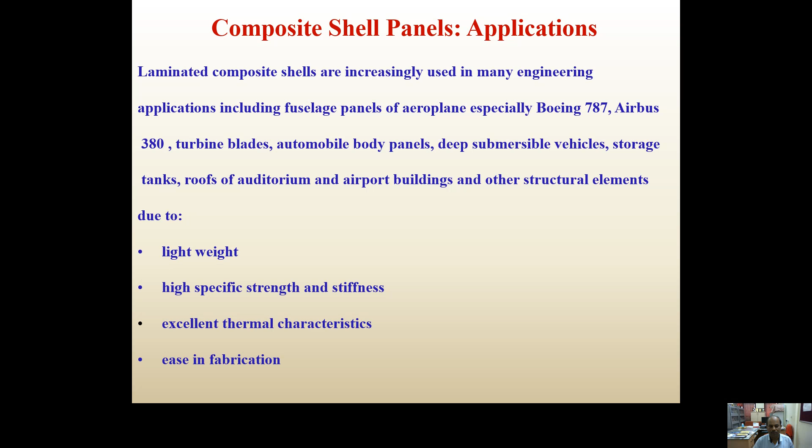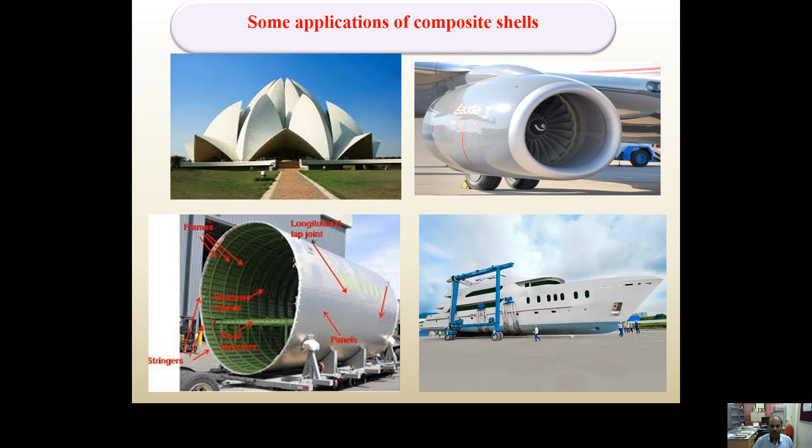The research significance of this study: shell structures are often subjected to dynamic loads, and free vibration of composite shell structures is an essential component of its dynamic behavior. Many aircraft failures are attributed to dynamic behavior of composite panels.

The vibration behavior of composite shells are significantly affected by varying environmental conditions due to wide ranges of temperature and moisture absorption. Aircraft on ground and in air have very different temperature ranges, so also different temperatures from cold to hot countries, and boats and ships in seas.

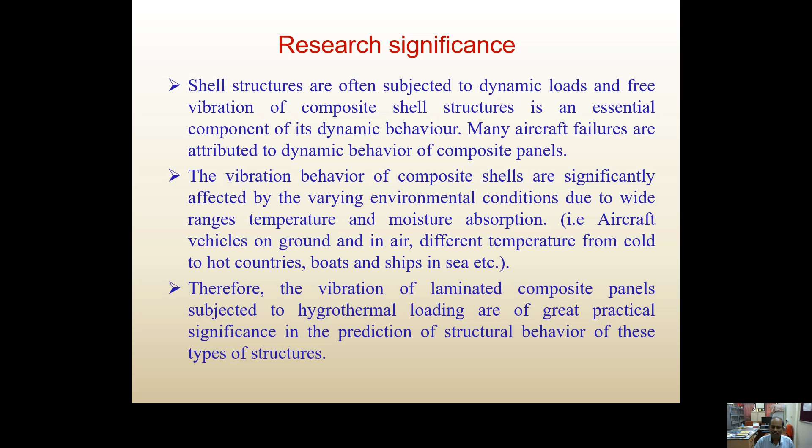Therefore, the vibration of laminated composite panels subjected to hygrothermal loading is of great practical significance in the prediction of structural behavior of this type of structures.

Coming to the literature review, some studies are available on vibration of shells subjected to hygrothermal load, though there are plenty of studies available on vibration of shells in ambient temperature. Very few studies are available on shells subjected to hygrothermal load.

Some examples are Parhi et al., Naidu, Sinha, Nanda, Pradyumna. They have studied hygrothermal effects on dynamic behavior of laminated plates and shells using finite element method. Mohapatra et al. has also studied nonlinear free vibration of laminated shells in hygrothermal environments using FEM.

Bishes et al. has studied free vibration analysis of smart laminated CNT reinforced composite cylindrical shells under hygrothermal conditions. However, these studies are numerical only. The experimentation on shells subjected to hygrothermal load is not available in literature.

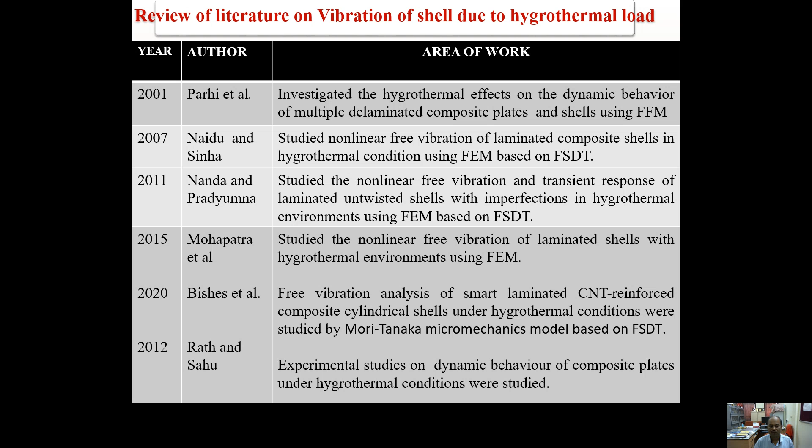However, some studies are available on plates subjected to hygrothermal loading. Rath and Sahu has studied the dynamic behavior of plates subjected to dynamic hygrothermal loading. There is another study, Panda et al., which has studied hygrothermal behavior of shells subjected to hygrothermal temperature and moisture.

Coming to the critical discussion, many researchers have worked on vibration analysis of laminated composite shells in ambient temperature and moisture conditions using various analytical and numerical approaches. The numerical studies on free vibration of unidirectional laminated composite shells subjected to hygrothermal environment are limited in literature.

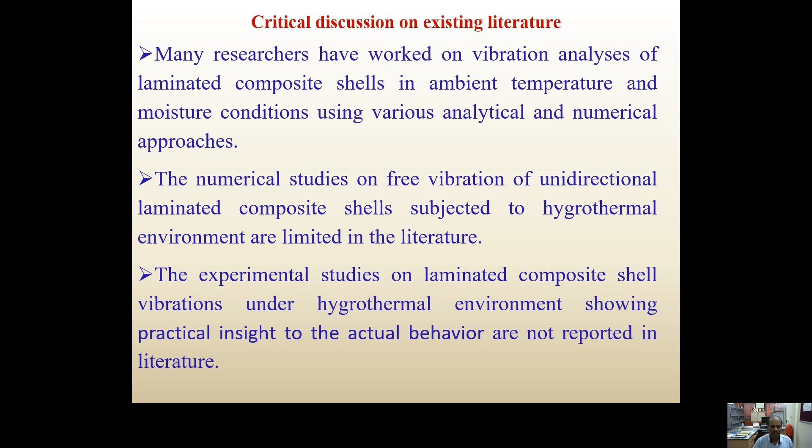The experimental studies on laminated composite shell vibrations under hygrothermal environment, showing practical insight to the actual behavior, are not reported in literature, and thus become the subject of the study.

Based on the literature review, the problems identified for the present study are: vibration of woven fiber glass epoxy laminated composite shell panels in hygrothermal environment is studied both experimentally and numerically using finite element method. The effects of curvature ratios, number of layers of laminate, and lamination sequences on natural frequencies of laminated composite shells for different temperature and moisture concentration under different boundary conditions.

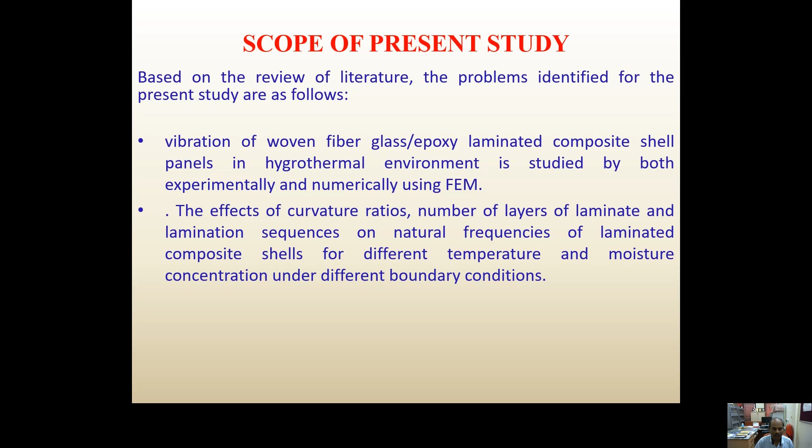Coming to the mathematical formulation, this is a typical doubly curved shell element. There are some assumptions in the analysis. The analysis is linear, implying both linear constitutive relations and small displacement. The curved panels don't have any imperfection. All damping effects are neglected.

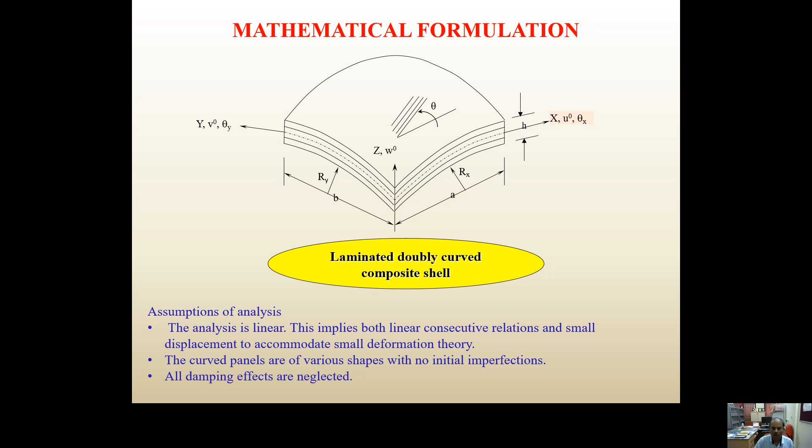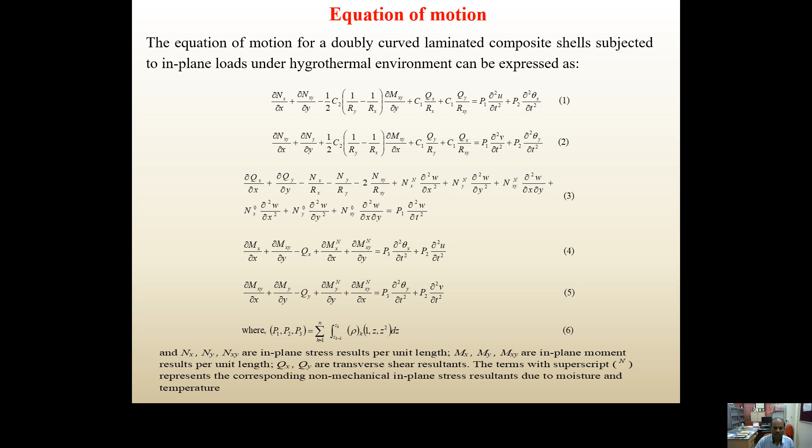This is the equation of motion of doubly curved laminated composite shells subjected to in-plane loads under hygrothermal environment. The terms related to Nx, Ny, Nxy are the terms coming due to the hygrothermal environment. This is the non-mechanical force entering into the equation of motion due to hygrothermal environment.

Coming to the finite element formulation, an 8-noded doubly curved isoparametric element based on first-order shear deformation theory is used for the present analysis of woven fiber composite shell panels subjected to hygrothermal loading. At each node, 5 degrees of freedom U, V, W, theta x, theta y are considered. This is the element.

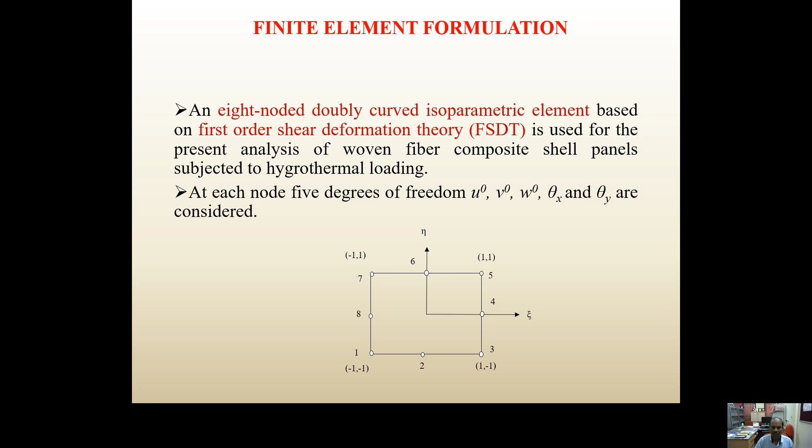This is the strain displacement relation with curvatures in x direction, y direction, and twisting curvature as well. Shear deformation has been considered.

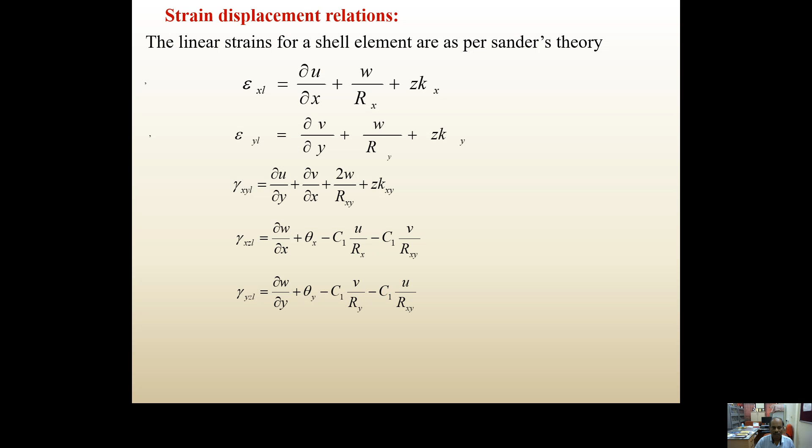This is the nonlinear strain components used to derive the geometric stiffness matrix due to the mechanical and non-mechanical loads.

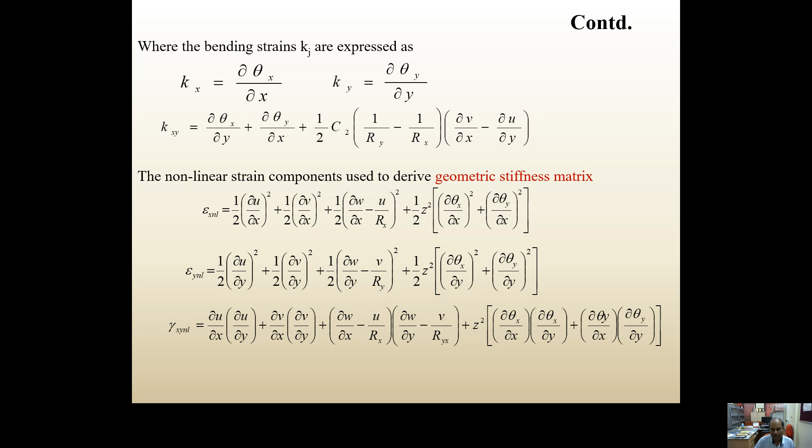As you can see, there is a force component Fn. So F are the normal forces Nx, Ny, Nxy, Mx, My, Mxy, Qx, Qy. These are the components normally we experience in composite forces. The first three are the in-plane forces, the next three are the bending forces, and the Qx terms are the shear forces. This is F equals D epsilon.

D is the constitutive relation, and Fn is the force developed due to hygrothermal condition. This component comes into picture when any structure is subjected to hygrothermal condition. This is reflected in the F equation as well.

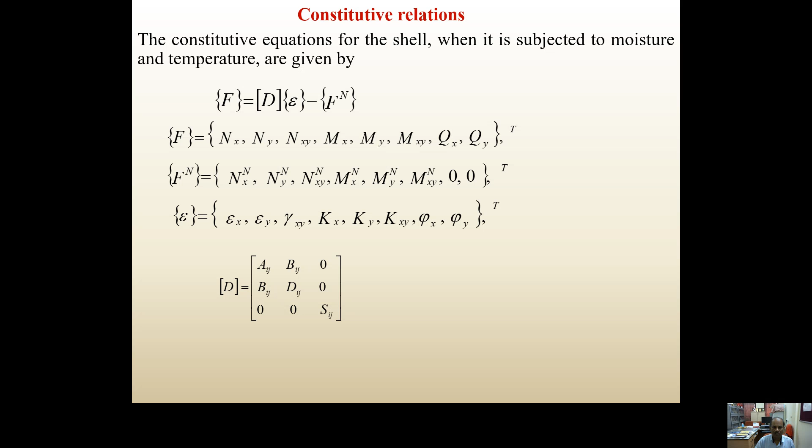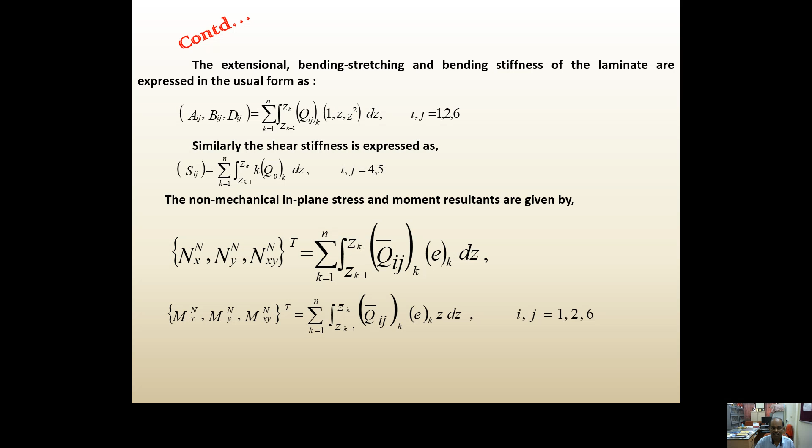So this is the constitutive relation D, which can be derived with respect to the stiffness coefficients: the in-plane coefficients, the bending coefficients, and the shear coefficients are found out like this. A shear correction factor of 5/6 is considered throughout the analysis.

In this slide, beta 1, beta 2 are the moisture coefficients of the lamina. Alpha 1, alpha 2 are the thermal coefficients dealing with the temperature of the specimen. C0 and T0 are the reference moisture percentage and temperature in Kelvin.

The element residual stress stiffness matrix due to hygrothermal loading is expressed in line with Cook et al. for mechanical loading, and this is G-transpose S G, Jacobian, modulus of Jacobian, d-xi d-eta.

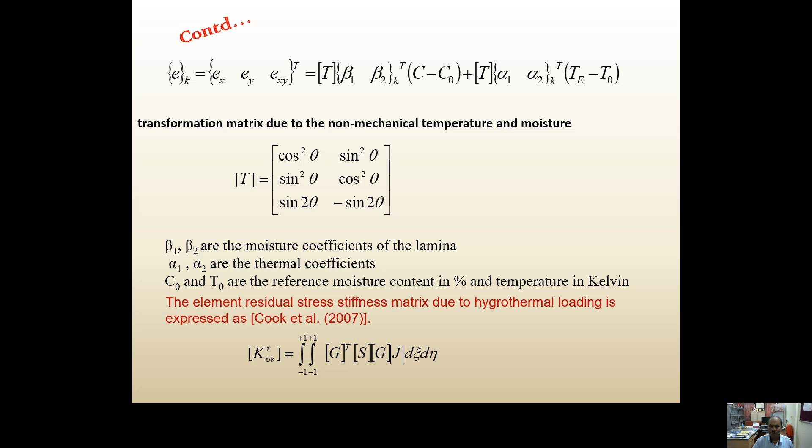This is the extra stiffness coming in for the composite formulation. Solution procedure: the stiffness matrix, the initial stress stiffness matrix, the mass matrix, and the load vector of the element are evaluated by performing numerical integration by Gaussian quadrature. The element matrices are assembled to obtain the respective global matrices.

Stiffness matrix K is the bending stiffness. The initial stress stiffness matrix due to hygrothermal loading is K sigma R or K sigma n, and mass matrix M.

The equation for free vibration of a shell panel subjected to hygrothermal loads may be expressed as K plus K sigma R, the extra term coming from hygrothermal loading, minus omega square M Q equals 0. This becomes an eigenvalue problem, so an eigenvalue solver takes care of this and gives us the frequency in radians, which can again be converted into hertz.

A program is developed in MATLAB environment to compute the natural frequencies of the shell subjected to hygrothermal environment.

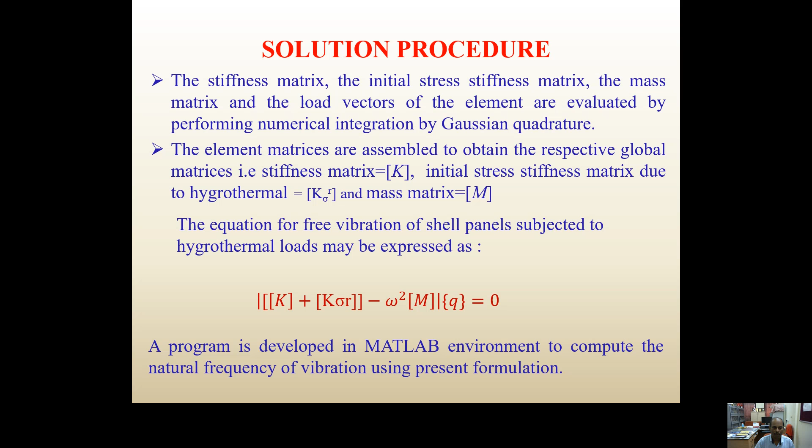Coming to the experimental program, the materials used are woven fabric glass epoxy: e-glass woven roving as reinforcement, epoxy as resin, hardener as catalyst at 8% of the weight of the epoxy, and polyvinyl alcohol as the releasing agent. Fabrication has been done with the hand layup method. Liquid resin is placed along with reinforcement, the glass fiber against the finished surface of an open mold. The percentage of fiber and matrix taken is 50:50 by weight.

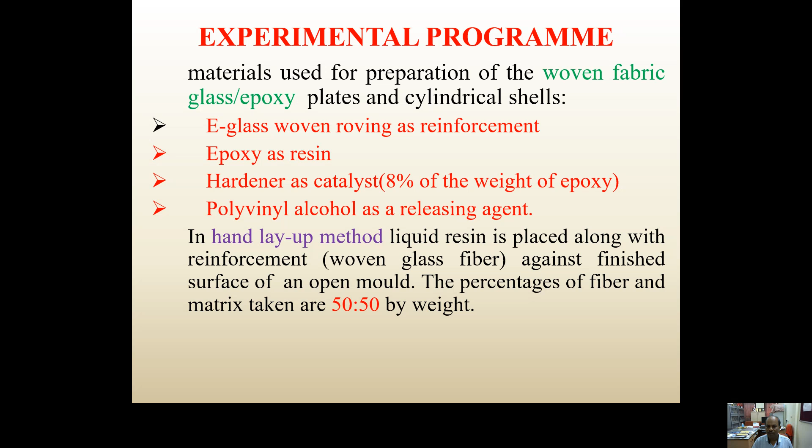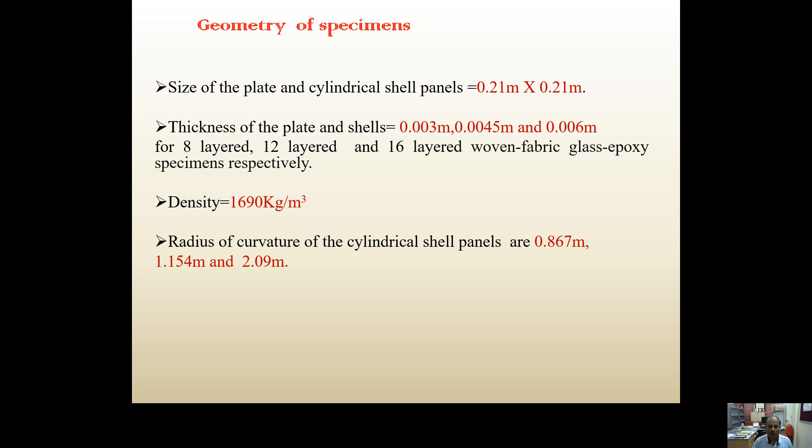Geometry of the specimen: size of the plate and cylindrical shell panels is 0.21 meter by 0.21 meter. Thickness of the plate and shells is 0.003 meter, 0.0045 meter, and 0.006 meter for 8-layer, 12-layer, and 16-layer woven fabric glass epoxy specimens respectively. The density of the specimens is 1690 kg per meter cube. The radius of curvature of the cylindrical shell panels was found to be 0.867 meter, 1.154 meter, and 2.09 meter.

This is how the fabrication has been carried out. The specimens are treated in an oven for increase in temperature, and the specimens are treated to moisture in a humidity chamber.

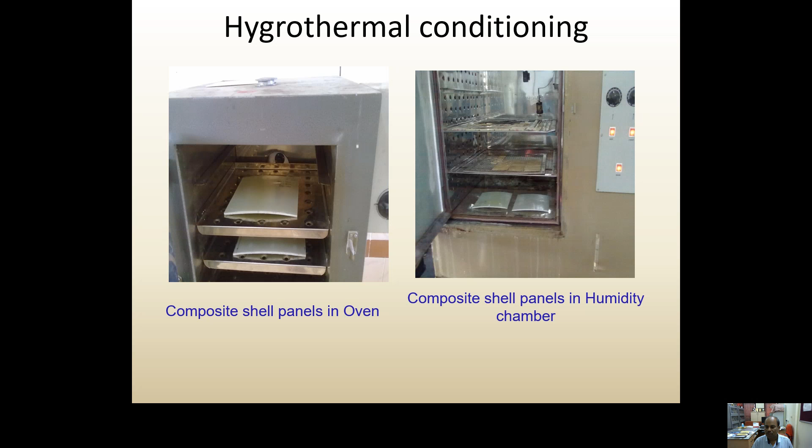Then the material elastic constants were determined experimentally in Instron 8862 for different temperature and moisture concentration by tensile test as described in ASTM standard D3039.

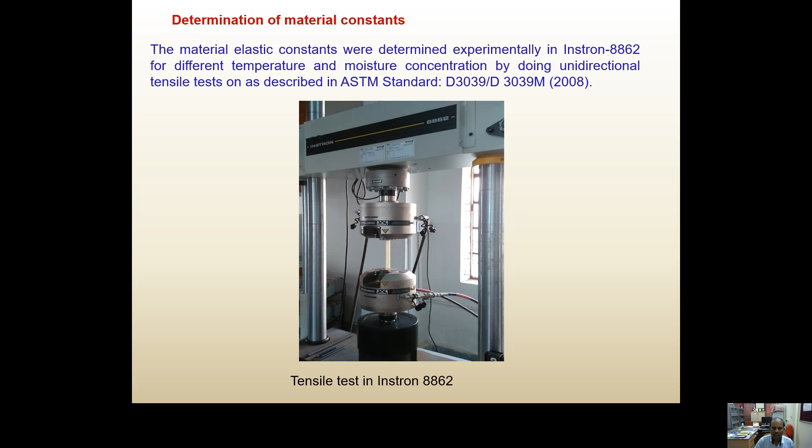Free vibration test has been conducted with FFT analyzer Bruel and Kjaer 3560C. For this, a modal hammer B&K 2302-5 and accelerometer B&K 4507 has been used. A Pulse Lab software has been used as the interface.

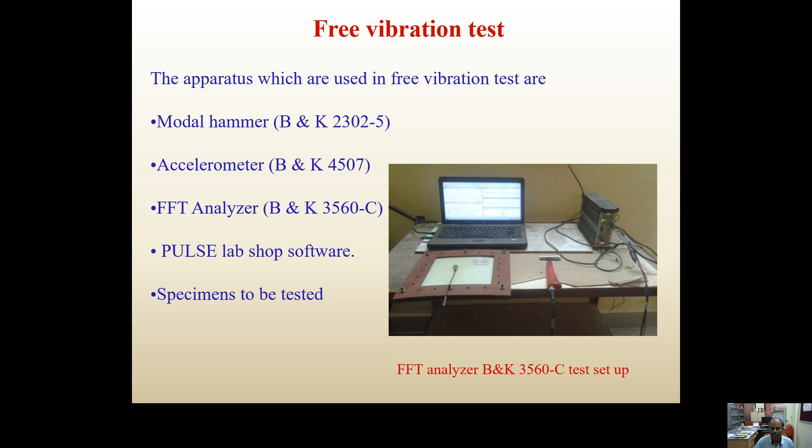The boundary conditions for the free vibration test: 4 sides simply supported, 4 sides clamped, 1 side clamped and 3 sides free (that is cantilever), and 2 opposite sides clamped with 2 other sides free. These are the boundary conditions considered.

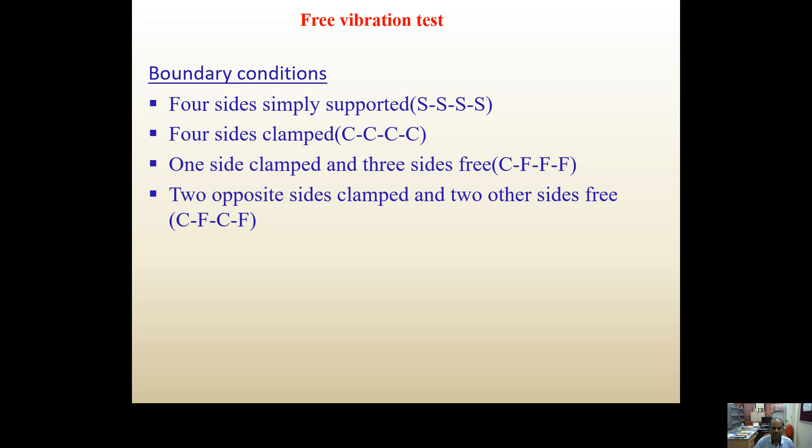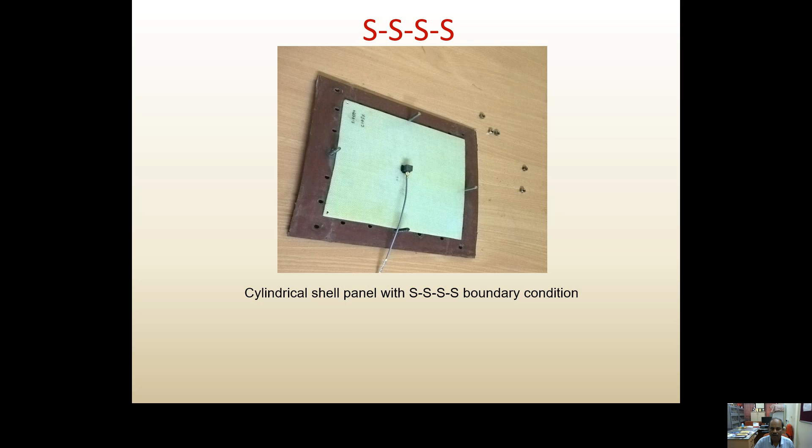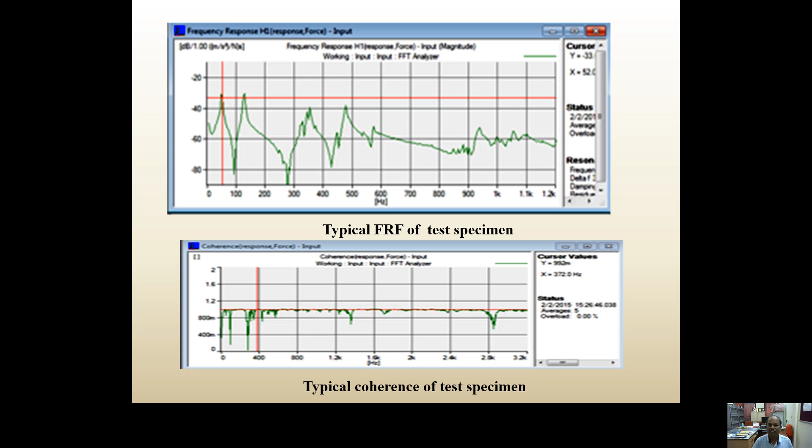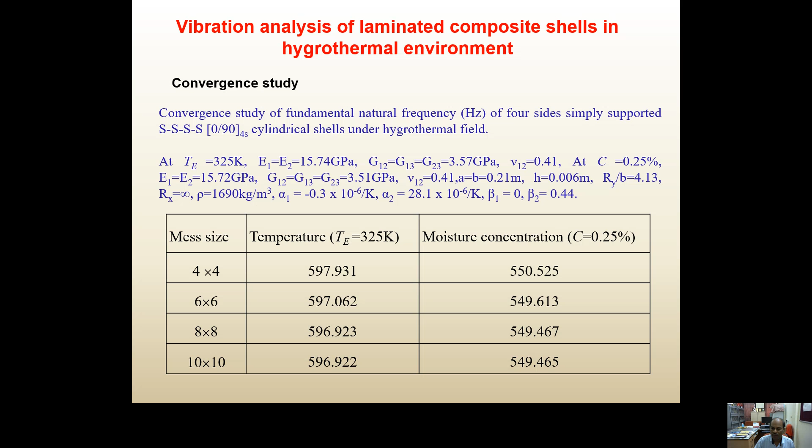The result and discussion: the first one is convergence study. A convergence study is carried out to find out the fundamental natural frequency of 4-side simply supported cylindrical shells under hygrothermal field for different mesh sizes like 4x4, 6x6, 8x8, and 10x10, as shown in the table. The mesh of 10x10 shows good convergence and is used throughout the study.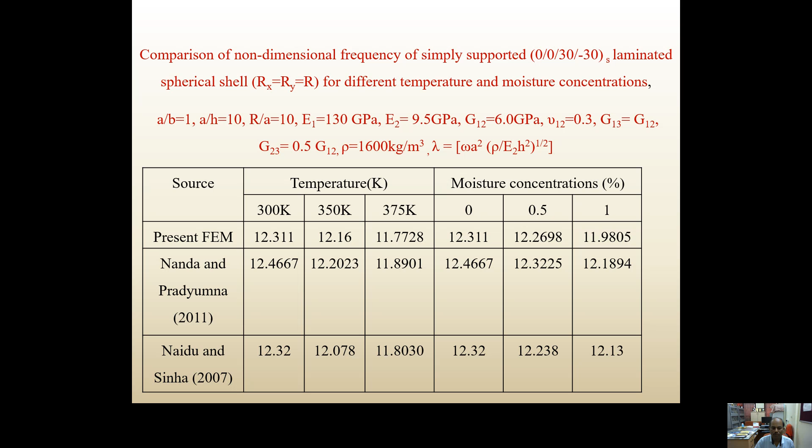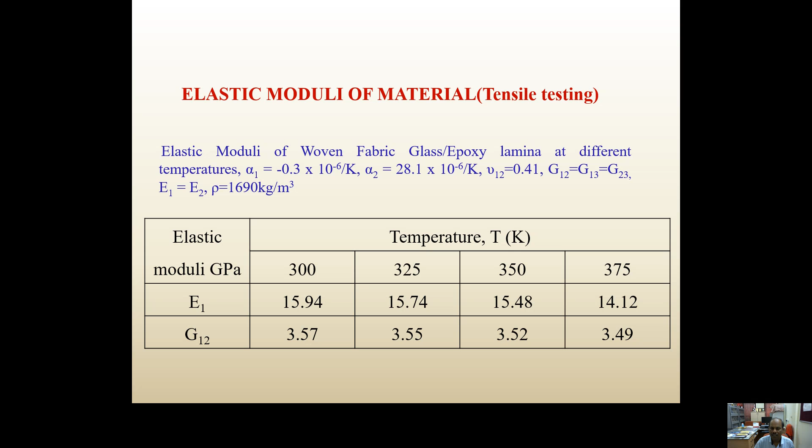The elastic moduli of the material found during tensile testing: E1 is 15.94, which gradually decreases to 14.12 with the application of temperature. Similarly, the shear modulus is 3.57, gradually reducing to 3.49 by increasing the temperature from 300 to 375.

Similarly, for the effect on elastic moduli due to moisture concentration, the Young's modulus E1 is 15.94, reducing to 14.8 with the increase of moisture from 0 to 0.75%. Similarly, the shear modulus decreases from 3.57 to 3.39 with increase of moisture.

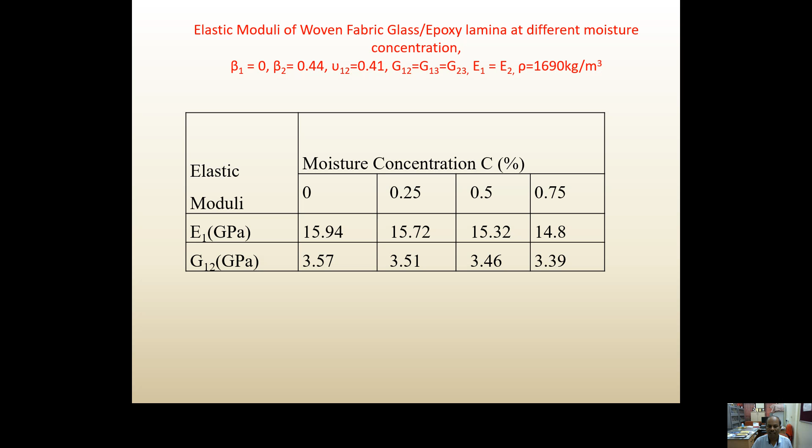Coming to numerical and experimental results: this is a simply supported cylindrical shell panel. Different R by B ratios have been shown. The last one is R by B infinity, meaning actually a plate. These are all shells.

The frequency is increasing with the increase of curvature, R by B, of the panels, and decreases with the increase of temperature. All the frequencies decrease with the increase in temperature, which has been increased from 300 to 375 degrees.

So at 300 Kelvin, the fundamental frequency is increased in the range of 15.87%, 45.64%, and 72.58% as compared to that of a plate, by providing a curvature ratio of 9.95, 5.49, and 4.13 respectively, due to increase of stiffness. The fundamental natural frequency reduces by 40.97% and 57.05% with the increase of temperature.

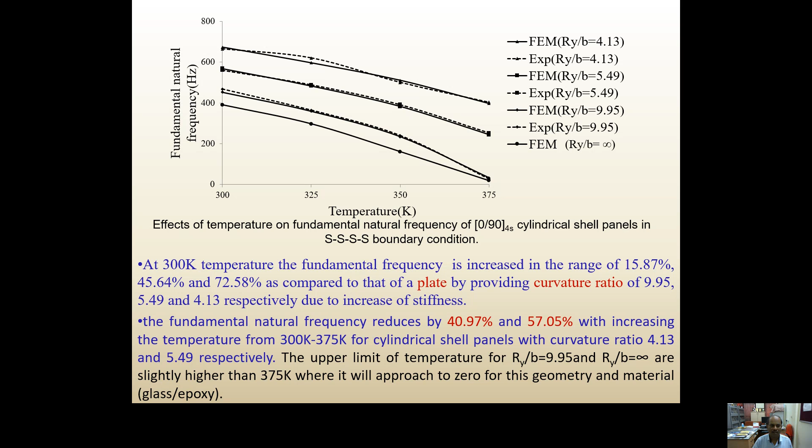Similar studies have been carried out with clamped boundary condition. The frequency also reduces, though the clamped frequencies are significantly higher in comparison to the simply supported shell panels. The frequency is reduced with the increase of temperature.

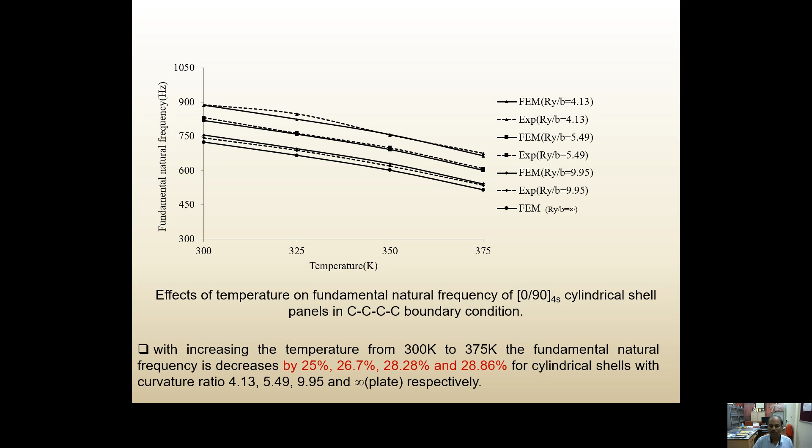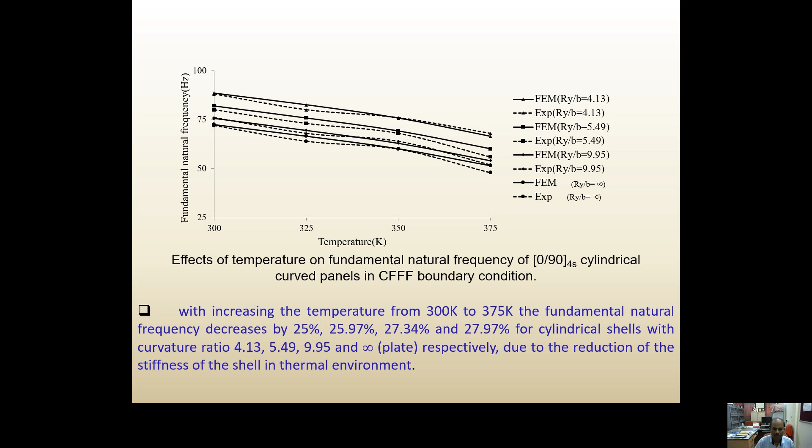Similarly, for cantilever shell panels, cylindrical shell panels, the frequencies are much less in comparison to the other simply supported and clamped shell panels, and the frequencies reduce with increase of temperature, though of different percentage.

Similarly, studies are also conducted by moisture concentration. The moisture is varying from 0 to 0.75%. The shells, as you can see, shell panels are affected significantly with the increase of moisture at 0.5 moisture concentration. So the plate and the shallow shells are coming to nearly negligible stiffness.

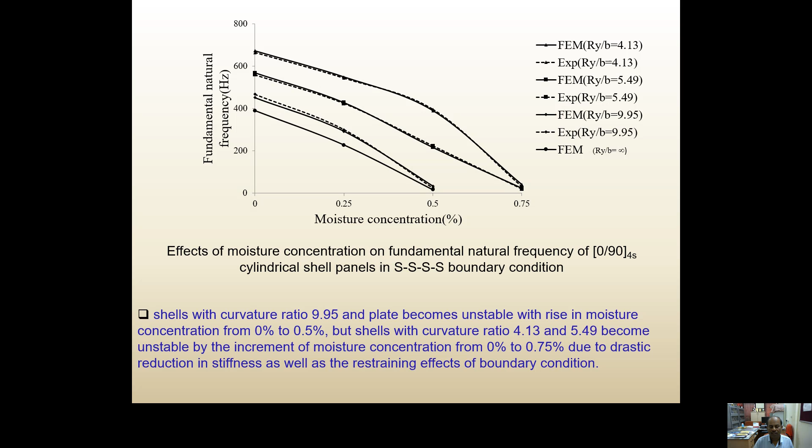Similarly, at 0.75, the shell panels are coming to negligible stiffness. In comparison to temperature, the shell panels are significantly affected with the moisture. Similarly, the effect of moisture on the clamped boundary condition, the frequency is reduced with the increase of moisture.

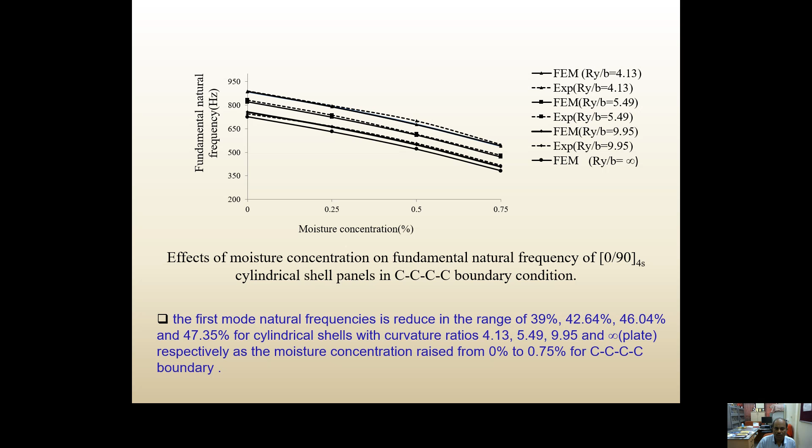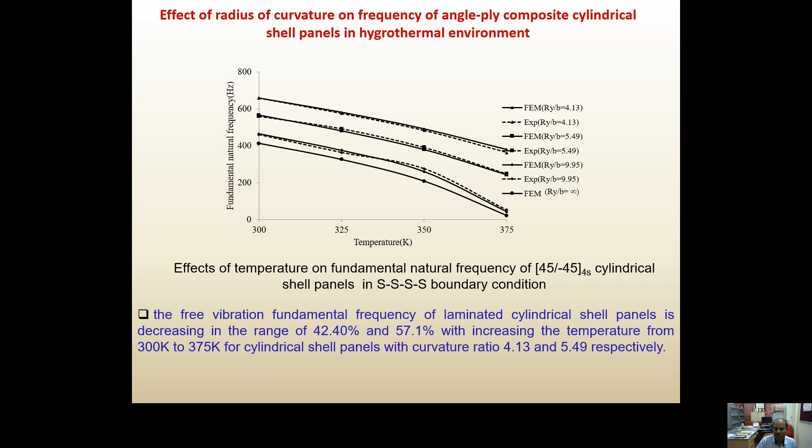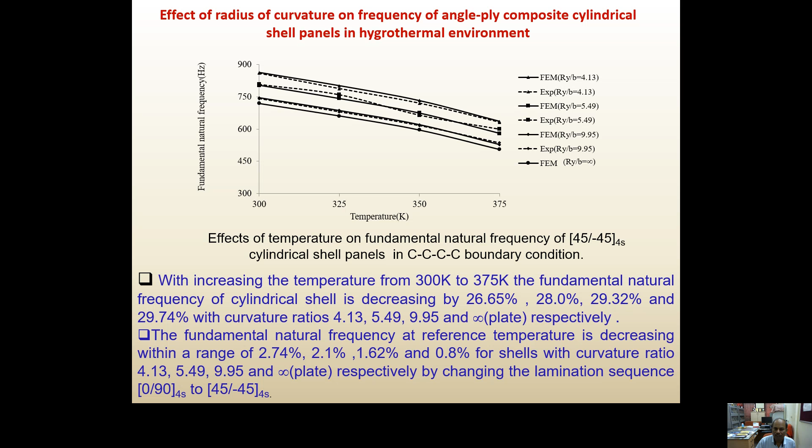The effect of curvature and frequency of angle-ply composite shell panels for clamped boundary condition. Though the frequencies are significantly higher, they are reducing with increase of temperature.

Next is the effect of number of layers. The study is also undertaken for different number of layers. There is an 8-layer specimen, a 12-layer specimen, and a 16-layer specimen.

With increase in number of layers, the frequencies increase, and the 8-layer specimen is reaching negligible stiffness at 350 degrees, but the 16-layer specimen is still having sufficient stiffness at 375 degree temperature.

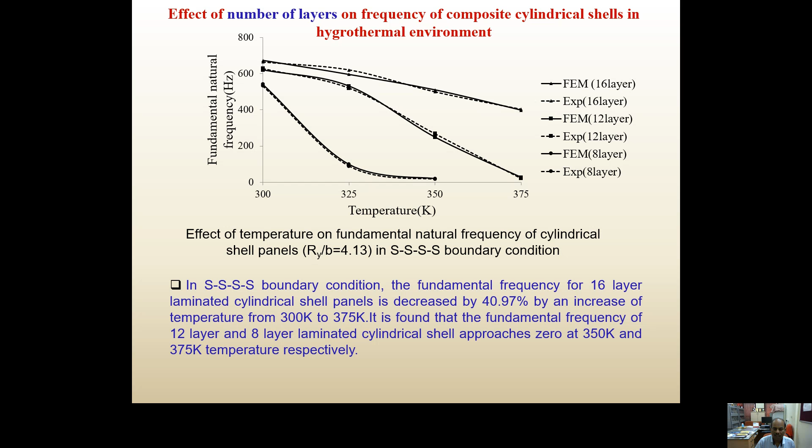This happens due to the effect of bending-stretching coupling.

Similarly, the effect of number of layers is studied also for moisture concentration. With increase of moisture, the shell frequency has been found for different cases. At 0.5 moisture concentration, the 8-layer specimen has negligible stiffness, but the 16-layer shows very high stiffness, and significant stiffness is still retained, though everything is decreasing, with increase in number of layers.

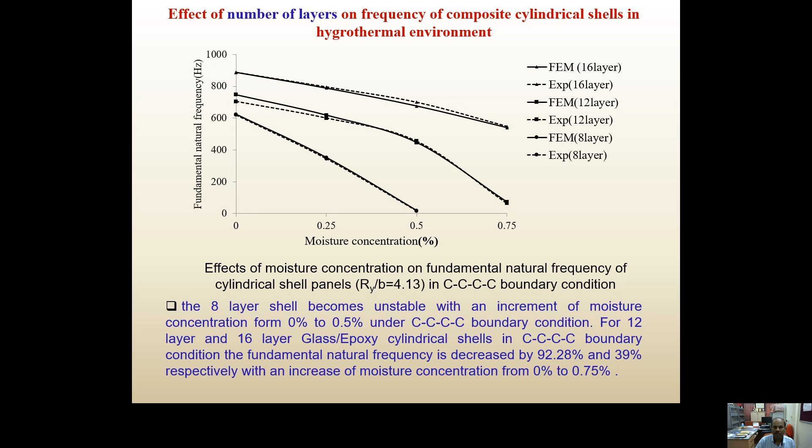Some numerical studies are also found for doubly curved shell panels under hygrothermal loading. This is a spherical shell panel subjected to fully clamped boundary condition for different curvatures. The frequencies are significantly increasing with respect to the cylindrical panels, but they decrease with increase of temperature.

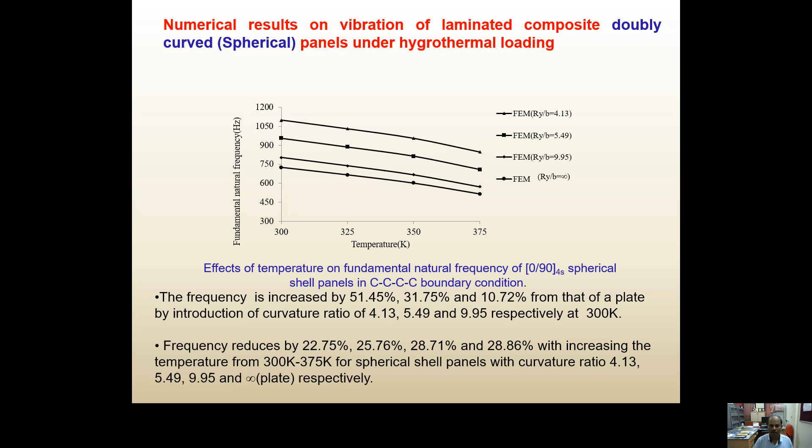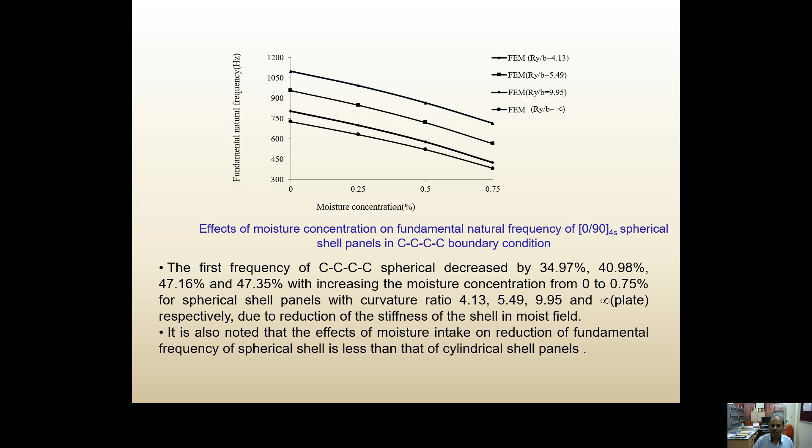The effect of moisture concentration on the frequency of spherical shell panels subjected to clamped boundary conditions: the frequencies decrease with increase of moisture concentration.

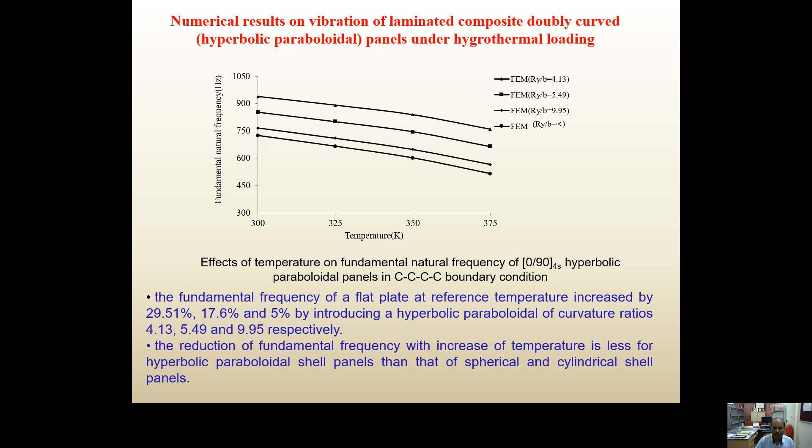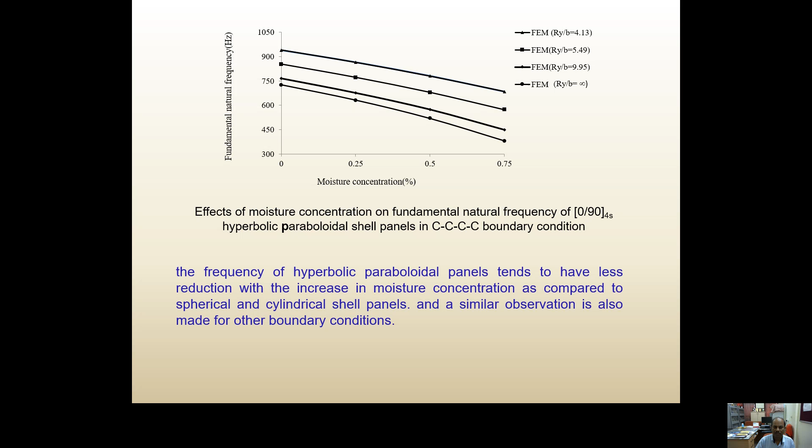Coming to the conclusion, the fundamental natural frequency of free vibration of laminated composite shell panels increases with decreasing curvature ratios in all boundary conditions, with maximum increase for the simply supported case.

With increasing the number of layers of laminates, the fundamental natural frequencies of laminated composite shells increase. The natural frequency of free vibration of laminated composite shells is reduced with the increase in uniform temperature and moisture concentration due to reduction of the stiffness.

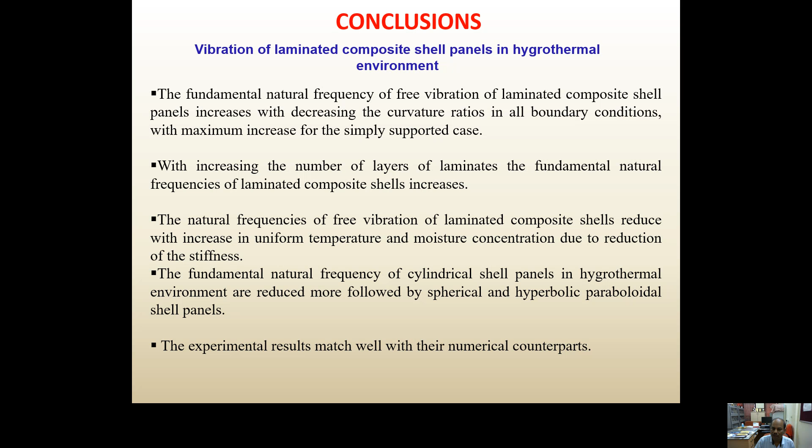The fundamental natural frequency of cylindrical shell panels in hygrothermal environment is reduced more, followed by spherical and hyperbolic paraboloid shell panels. In all cases, the experimental results match well with the numerical predictions.

A generalized finite element based formulation is developed for the vibration of shell structures subjected to temperature and moisture conditions. A program is developed in MATLAB environment to compute the natural frequency of vibration using the present formulation.

The benchmark experimental and numerical vibration results presented in this investigation can be suggested as design aids for shell panels subjected to hygrothermal loading for the range of geometry and material parameters.

It can be concluded that the free vibration behavior of shell structures is greatly influenced by the geometry, material, boundary conditions, and hygrothermal conditions. These experimental results can be a benchmark problem for many researchers and helpful for design of composite shells.

The free vibration results can be used as a technique for structural health monitoring or testing of structural integrity, performance, and safety. The above recommendations for design of composite panels are valid within the range of materials, hygrothermal, and geometrical parameters utilized in the study.